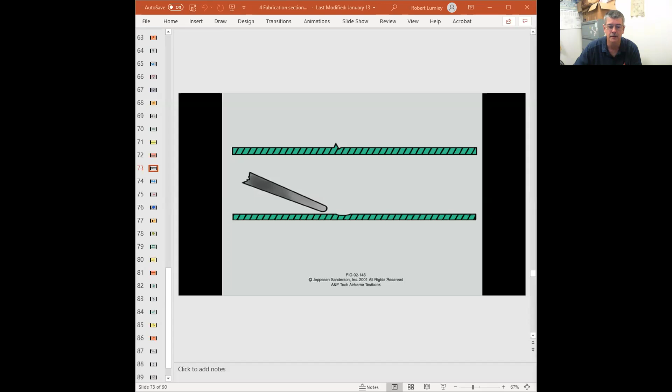In fact, I think I'm going to tell a little story just to get us going. All right. So I'm going to... you can probably see me. I need to go here. Hello, I'm in my office. Okay. And I'll give you an example of trying to assess damage. Okay.

Where I worked, we were an FBO here on North Perry Airport. We were a repair station, we were a flight school, and we also rented out aircraft. Well, a gentleman that I knew, a customer of ours, had rented out a Cessna 172. He comes back and comes up to me and goes, "Hey, Bob, got a problem." "Oh, what happened?" He goes, "Ooh, I hit a bird." Now, to be honest, hitting a bird here at North Perry Airport wasn't an everyday event, but it was not uncommon. And usually, okay, dent in the wing, leading edge.

Sorry, I don't know if you can see what I'm doing. Let me see if I can move that more. Yeah. I want rid of that. Okay.

But usually, okay, the leading edge has been dented. And we've done repairs like that before, and primarily we undo the leading edge, and we form it by rolling a new piece and then riveting it up. Not much of a big deal. Well, I'm like, oh, okay. So we go up to the aircraft, and it was on the left wing.

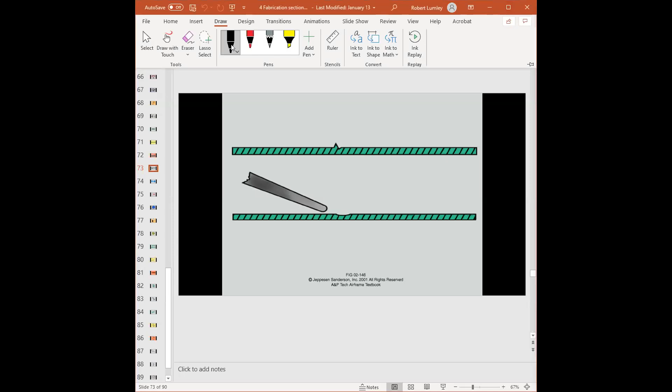Under inspection of riveted joints, there's a thing called rivet tipping. What that means is, if we had rivets holding two pieces of metal together, say along a seam, and one piece of metal has been pulled one way and the other this way, creating a shear load on that rivet, the rivet may have been stressed, but not enough that the rivet has physically failed.

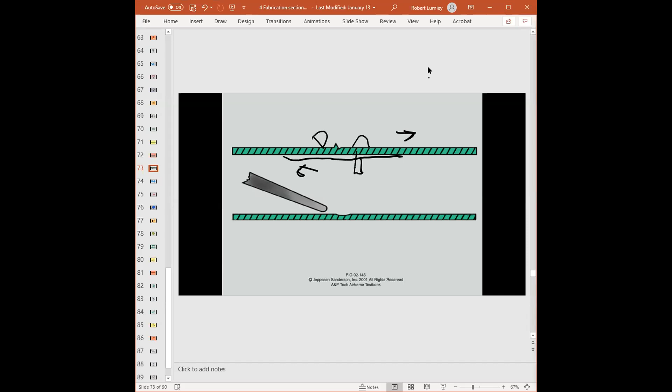But what we'll end up having, and this is an extreme case, is what's called rivet tipping. Right here, you can see the head of the rivet is laying flush against the skin. In rivet tipping, the head will actually tip up away from the skin. And that is a good indication that it has been under a lot of stress.

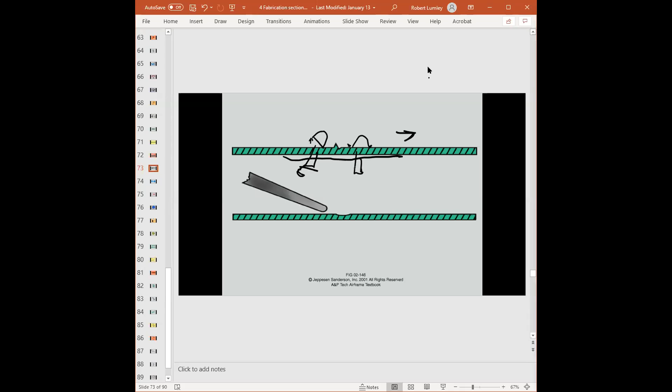So when we are removing rivets in this particular area, one of the things we want to look for is the holes. When you remove the rivet, the hole will misalign. That shows the metal was still under stress and strain. Eventually, once you remove enough rivets, you will see the holes stay parallel to each other, they won't move anymore. And that's when you know you've removed enough rivets that there's no longer any stress trying to pull it apart. And those are called tipping rivets.

Of course, we always want to inspect for corrosion if we're doing something, because a lot of times there's some hidden corrosion and such. And I'll talk about that a little bit shortly, because as I said, there's going to be more stories and stuff, but I want to kind of get through what the book has first.

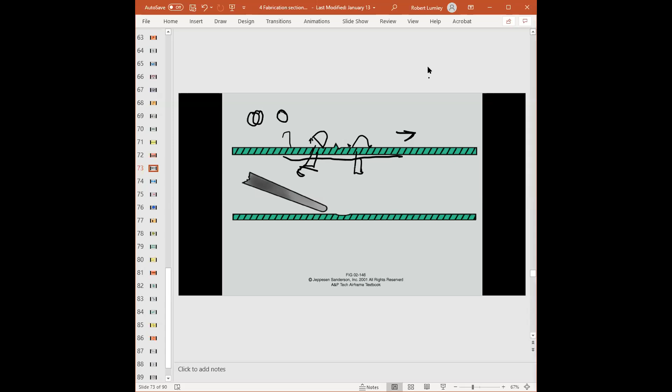All right, repair of negligible damage. What they're showing here is pretty much a nick that hasn't really penetrated the skin very much, but even that, we don't want to leave it because this is where corrosion and stress cracks can start. So we want to burnish that out. And what that means is we don't just want to fold that lip back down, because that creates an inclusion. We actually want to dig it out and smooth it out so that there are no stress risers that would concentrate the stress and create a crack.

Okay. Now, on pages 296 and 297, they go into specific sheet metal repairs. And to be honest, folks, the majority of the time we do not design the repair ourselves, okay? The majority of the time, what we try to do is find an approved repair that has already been designed. Now, I kind of jumped, but understand that there are what's known as minor repairs and there are what's called major repairs.

Does anybody remember major repairs? Has anyone heard of major repairs? If it affects the seam, something like that? Okay, yeah. It's something that could dramatically impact the airworthiness of the airplane. So you can do the repair, but you need to submit a Form 337 to the FSDO. Very good. Yes, a major repair alters the aircraft so much that it has to be repaired very specifically and has to be approved by the FAA.

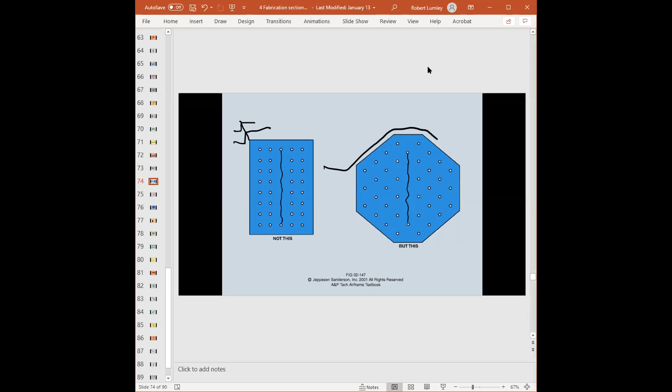Okay. When we go to make a repair, we usually try to be simple. We try to find a repair that has already been done, and I'll show you what I'm talking about shortly. But right now, we see we have a crack. We say not this, but this. Now, is this one unacceptable? No, it meets all the criteria to do the job. But is it the best way to do it? No. Why? Because here we could have the stress and we could actually create a weak spot or an area that would crack. We would rather have one like this so that the stresses flow around the material better.

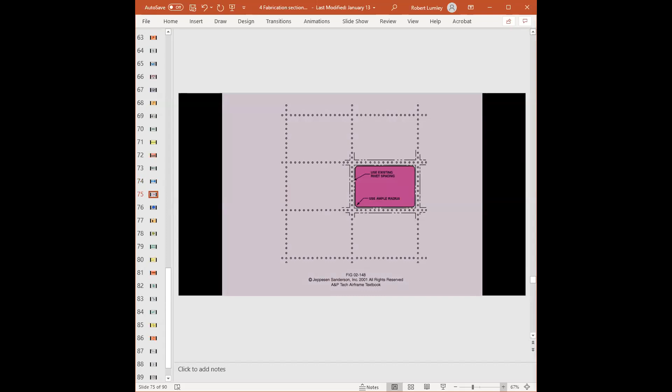Now, sometimes we can't fit this type of octagon patch into the same place. We might be limited by the space that we have. So this is still acceptable, but it's not the preferred method. But here's the thing we have to look at. Let's say that 2-inch crack was right here. Would we really want to try to put a patch right there? You might want to, and that could be what's known as a surface patch. But here's an alternate. Could we go in there, drill 4 holes, and then cut it out? You know how we did the window?

Right? Okay. And then what we would do is drill out all the rivets around here. We get a new piece of metal. We slide it underneath, and then we drill, as we back drilled before, and then reinstall the rivets. Now, out of the two, I think just replacing that section is much better than actually putting a splice up on top. Does that kind of make sense?

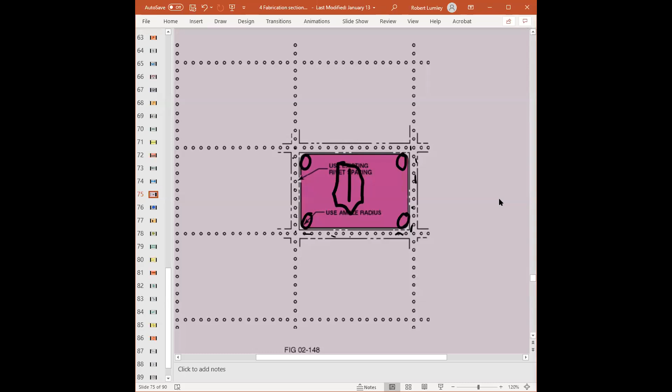So you drill the holes and you leave the holes empty. But you got to put the rivets back in. Yeah, the rivets around. Yeah, but just like we did with the window, we cut out the damaged area, but we're doing the whole section here. Okay. And then what we're doing is we've unriveted where the skin is attached to, say, the stringers. Okay. And then we're cutting a new piece of metal and putting it underneath that. Yeah, it's almost as though what you're describing here more closely restores the original contour, condition, the look; you don't have this big thing right there.

Right. Now, the next thing is this. For example, you might actually see that the aircraft is made of individual sheets. So we might have an individual sheet that is this big. So instead of even doing this, we might actually go in there and say, all right, let me unrivet all this and just put a brand new sheet in. Does that kind of make sense?

I'll relate it to this. Your fender of your car gets dented, damaged. Okay, we could go in there, cut out that damaged area and try to weld in a small little piece, or we could replace the whole fender. Many times, doing the whole panel is quicker, cheaper, and it comes out as a better look. You see what I'm saying?

Because no matter what, we have to get to the back side. So trying to do, say, a patch on here, we may still have to unrivet all this stuff and then try to re-rivet all that. And it's like, wow, that can be rather difficult.

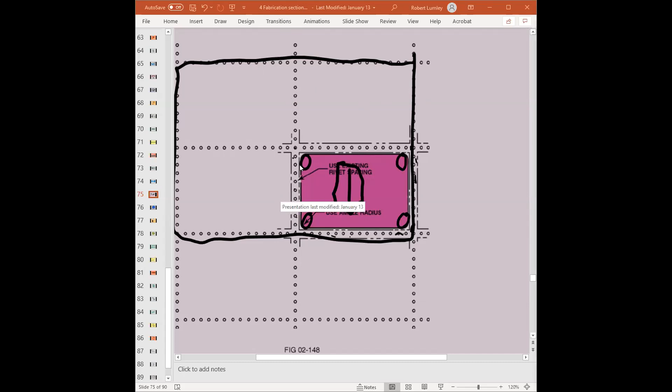If you cut out that and replace that, is that still a major repair? No. Oh, it's not, okay. Because you're replacing a small section rather than making an additional splice. Right. Like if this was the big sheet, right? And I sliced it down here, right? Then it is. Because I put an additional seam there in that panel. I know it's not easy.

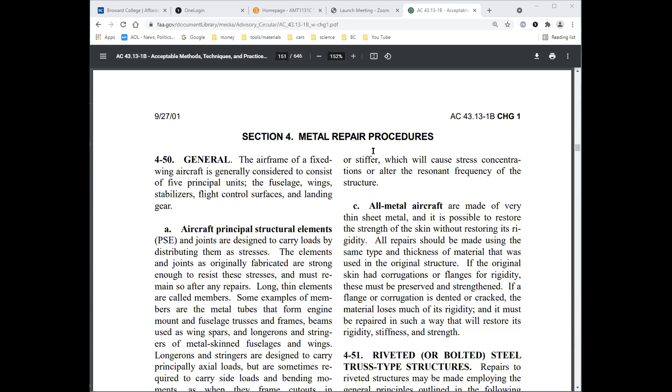But I thought that even though that little purple area is small and all we're doing is replacing, that AC 43-13 says that anytime you're riveting or welding, that's a major repair, irrespective of how big the area is. No, no, we can go through that when we get into class to show you. Okay. Because you got to go to Appendix A and stuff like that.

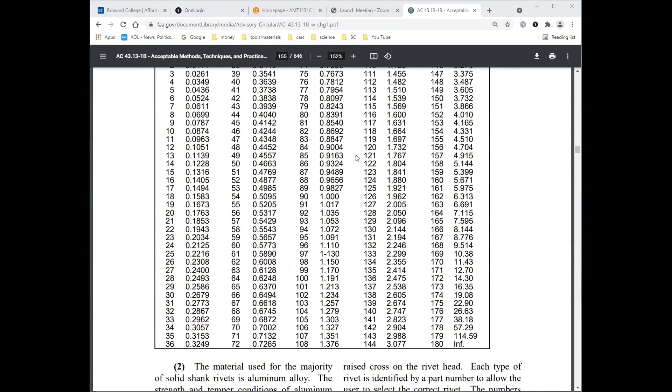But, and so here's 43-13, and this is what I wanted to get to is when you're making repairs, and we're going through, I'm getting to the point here, with the AC 43-13, okay. Sorry.

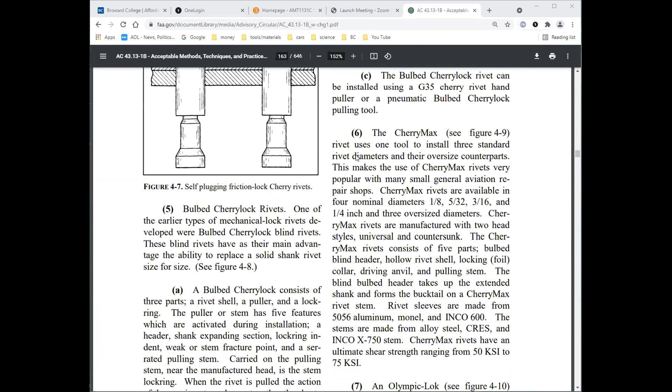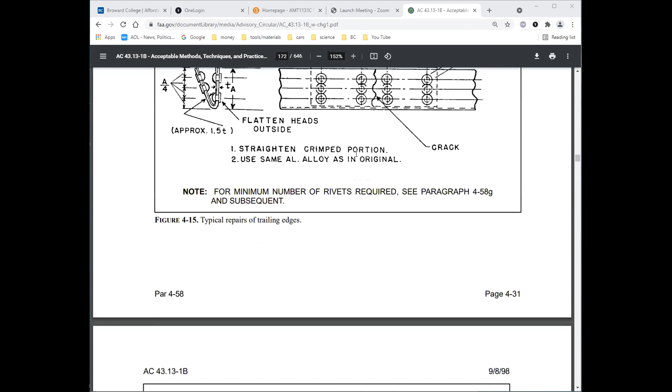I'm getting there. And you can see this, where I'm trying to get to. Okay, here it is. This right here is one of the most major ways that we try to identify what we can do.

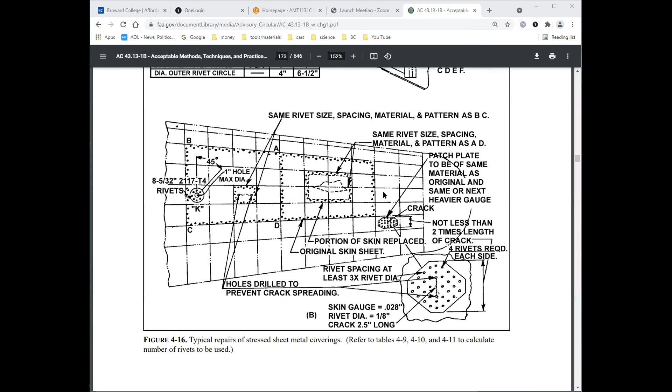So, for example, if we had, say, that 2-inch crack, here's the drawing of the repair for the 2-inch crack. So instead of us trying to figure it out, we can actually come here, and yes, we will have to do, say, the pitch and stuff like that, because of all the different things. But what I'm saying is, here's the information and what we're trying to duplicate for our repair. The same thing goes with our circular.

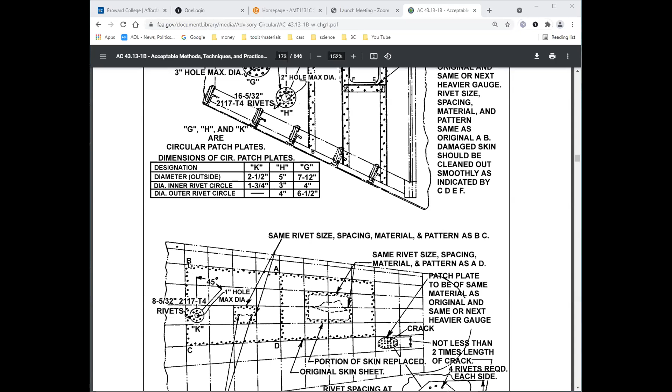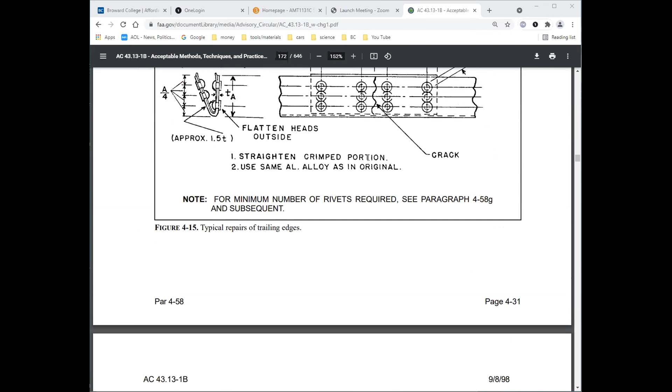Now, circular patches are pretty nice. Oh, I can't do it here, so I'll have to go back to my other in just a second. But understand that here's like for a 1-inch hole, and that's K. Or is it 1-inch hole maximum? That's the information to do that. Here's for a 2-inch hole, a 3-inch hole, and here's for what that section is there. So I'm just showing you AC 43.13 has quite a bit. Now let me go back.

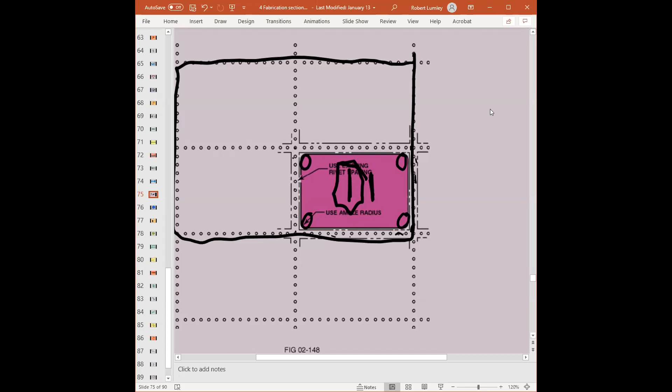Now, here's the thing. If we have a crack, just like what we have here, can you see that you have many, many options? We can, one, do the octagon shape and put in a huge number of rivets, like the one that was given to you. We have to put in 20-something rivets on each side. But if we do a circular patch, just because we have a crack going this way doesn't mean we have to do a rectangle or an octagon type shape. What's preferred is a circular.

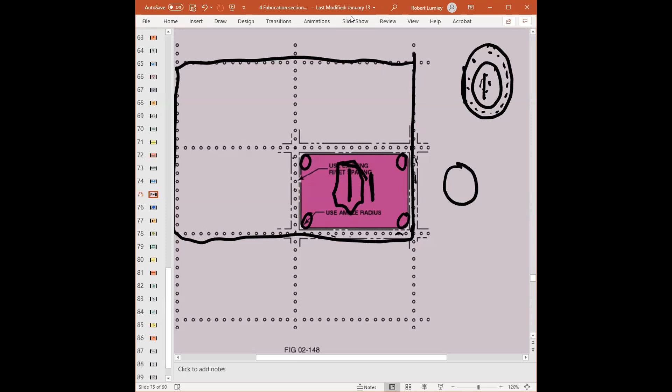So if, for example, this is a 1.5-inch crack, I could cut that out to a 2-inch circle, and then following AC 43.13, put in the rivets here, put in the rivets there, and it's a much simpler repair, and it actually is a better repair. As I said, 43.13 also shows that we can cut sections here to replace that portion of the skin as a patch. And ultimately, we could actually remove the whole skin and just replace that skin.

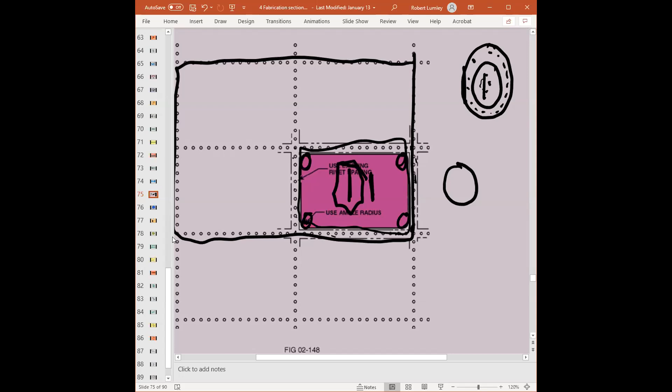Because one of the key components is that the biggest mistake people make in making repairs is that they want to make it bigger, better, and stronger than original. And that's a falsehood. We want to bring the aircraft back to its original strength and stiffness. Are we good there? Yeah. Okay. All right. So let me go back to 100%.

So before you continue, I'm a little bit lost with the purple patch. I don't understand the holes in the corners. It'll be easier on Tuesday when we come in. All right, sounds good. Because it'll be easy to show it on your project. Of course. All right.

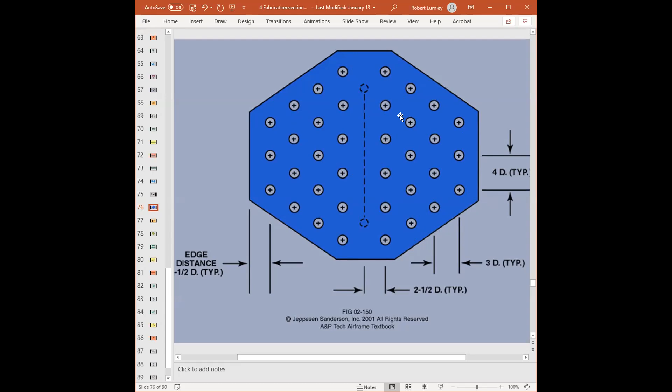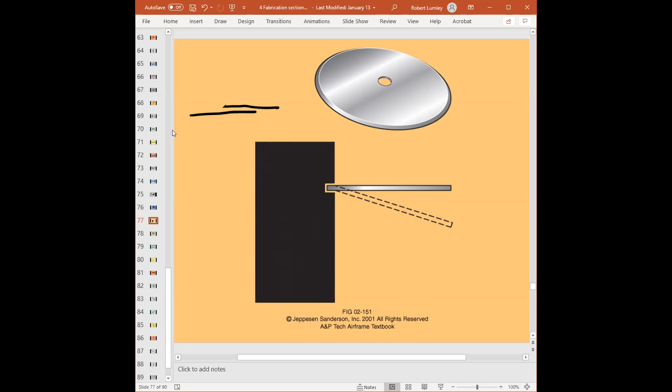In this picture, all they're showing is that sometimes the very edge of the metal, to keep it from lipping up. For example, if we have a skin and we're putting another piece of metal over top of it as a surface patch, we want to bend that down slightly so that no air, nothing gets trapped underneath. Puts a little downforce on that, okay?

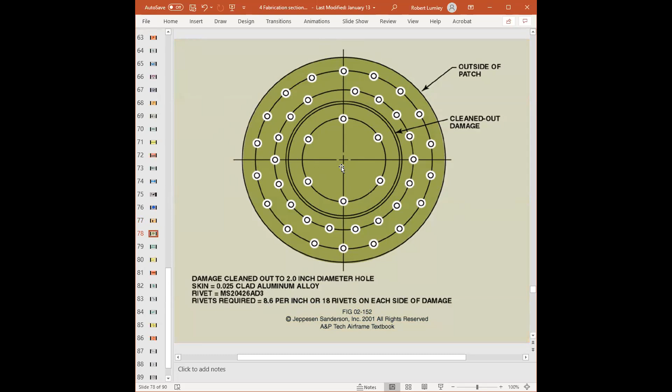This is going to be a circular patch. This is for a 2-inch diameter, and we see the multiple rows of rivets and such. This is the one that I will be explaining on Tuesday for the repair that we're going to be doing, but we're doing a 1-inch hole rather than the 2-inch. The rest of this information is all in AC 43.13. They just show that we line up the rivets, we just follow the instructions.

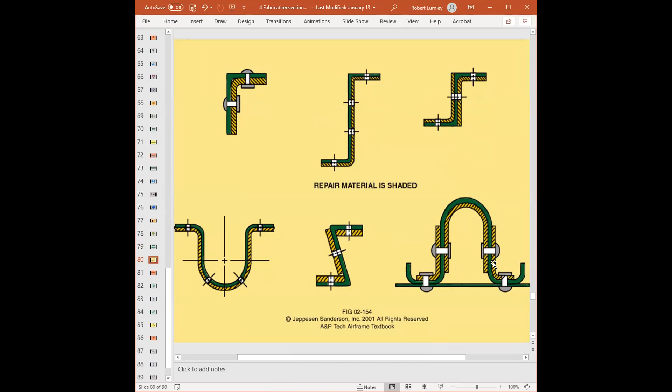If we had an angle, we might support it then on the inside, or the outside, but we want to back it all up, and depending upon what we need to support and regain that integrity of that part, it can be rather complicated. Trailing edge pieces and stuff, like I said, there's 100 little things, but we're just going as we're going.

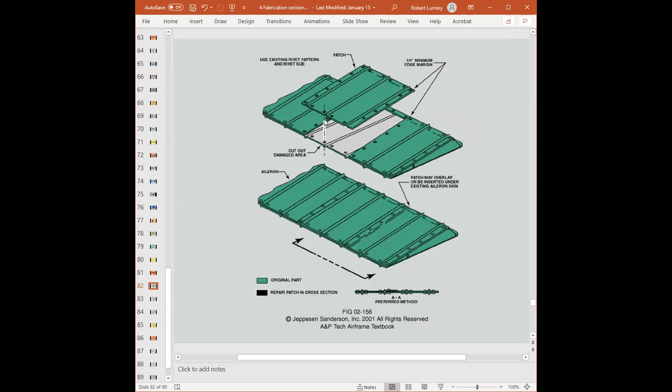All right, on this, here they're showing, for example, a corrugated control surface. Corrugations are basically, like on an aileron and stuff like that, the metal will have these little V's that go up.

What is that there for? It's to increase the stiffness of the metal, just like we put the beads in our bulkhead. Okay. To repair it, what can we do if there was damage? Well, if we can get some of that corrugated aluminum, which you can then remove and then reinstall a section of it, or cut the section out and put it in. Yes, that would be major repairs.

Okay. Now, to me, what's best is either find a brand new aileron, okay, or reskin the whole thing rather than making additional seams. Okay. What is a seam on that picture? What constitutes the seam? This used to be one full piece. Now it's 2 separate pieces, and you're adding a seam here and a seam over there. And these 2 pieces are not connected anymore, except for this piece.

Oh, the original one, now I see there's no rivets in the middle. Now there's rivets. Okay. Yeah. So if you're following the same rivet pattern, and using the same rivets there, you're not making an additional seam type thing. Does that make sense? Yes. Okay. So this almost goes back to the purple patch when somebody said, well, that would be a major repair. Not necessarily. And here you can see we're cutting the original piece totally. So now there's 2 separate pieces. So now what used to be 1 piece is now actually 3 pieces.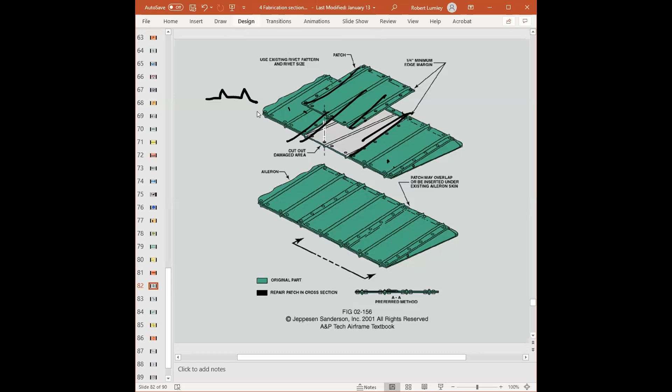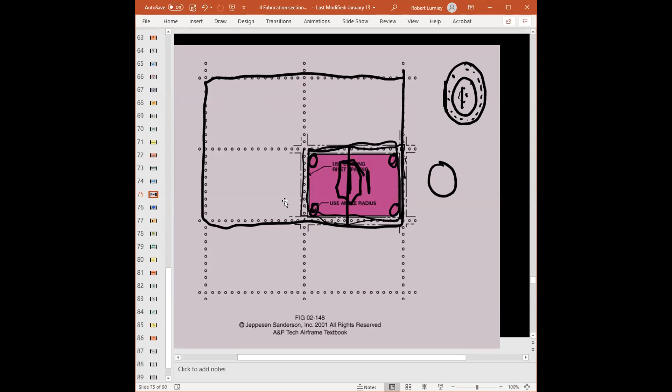And we've added seams. Like in here, we still have the main piece, and where those are riveted, we're just riveting that piece into there. We're not making an additional seam. I know it's crazy. An additional seam would be if we put a new rivet line there straight across. That makes sense. Thank you. Okay.

On control surfaces, and this is something that we will actually be doing when we go into what's called assembly and rigging, this is checking the balance of the control surface, okay? Because we do it in assembly and rigging, I'm not going to go over how to do it in this class. But control surfaces flying through the air can act like a flag. If you've ever seen a flag on a flagpole in a strong wind, the trailing edge of the flag will, what we refer to as, flutter back and forth. The control surface could actually flutter if the balance of the control surface is not within specifications, okay?

I would relate it to, think if your alignment on your car is off, your steering wheel could shake left and right, okay? And in flying, that we would call flutter, where the control surfaces are going up and down or left and right. And this is primarily a problem with the balance of the control surface. Now, when does an aircraft's control surface balance have to be checked? Whenever anything could change the balance of the control surface. If you make a repair to the control surface, say adding rivets and cutting metal out and adding metal to it, you're going to affect the balance. So the control surface then has to be balance checked.

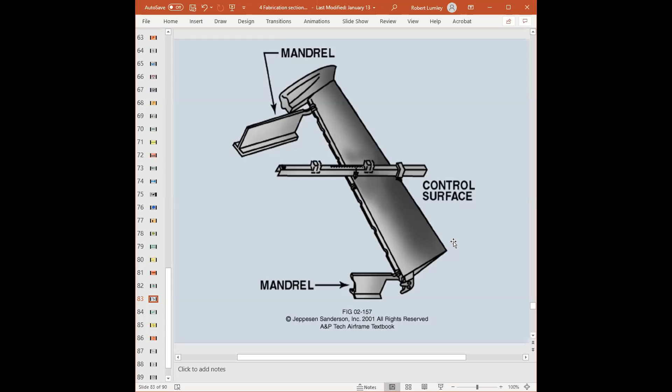When you paint an aircraft or paint a control surface, you have to do a balance check on the control surface. And those are the two primary things. Whenever something is done to the control surface that could affect the balance. Okay. All right. Inspection panel, nothing special there. Once again, they show a whole bunch of pictures of, here's a little repair, this is how this repair can be done. Okay, we could add doublers in that. And some of them, yes, are major repairs and some are not.

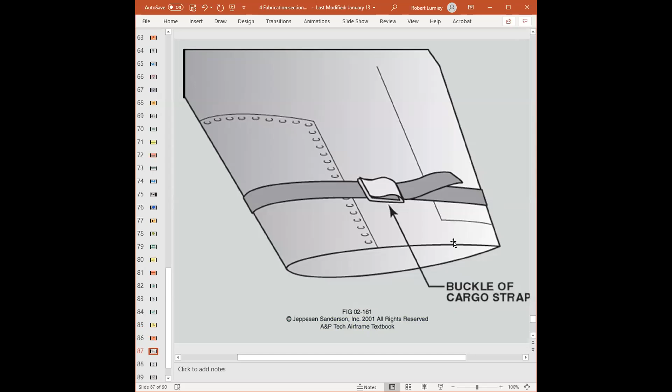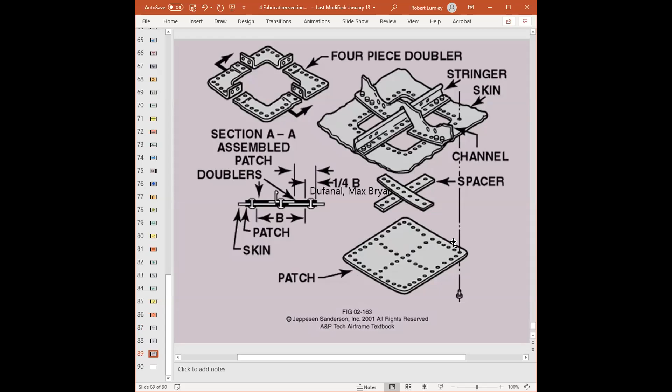Here again, we have a leading edge repair, okay? Now that they've replaced the leading edge, all they're trying to show here is how do you get it to fit nice and tight up against there? Use a cargo strap and pull it nice and tight and stuff like that. Nothing really specific. Again, they're just showing us a bunch of different little repairs and how they can be done. On Tuesday, we're coming in and we're going to do our repair so that you will have a sense of step 1, step 2, step 3. I know that was pretty short, but really that's what that section is, section D.

Sorry. I want to stop sharing that. Okay, there we go. Sorry, folks. I feel like I'm backwards today on this.